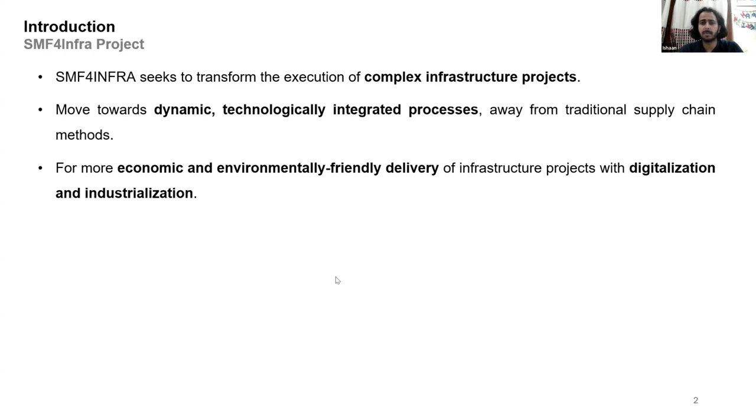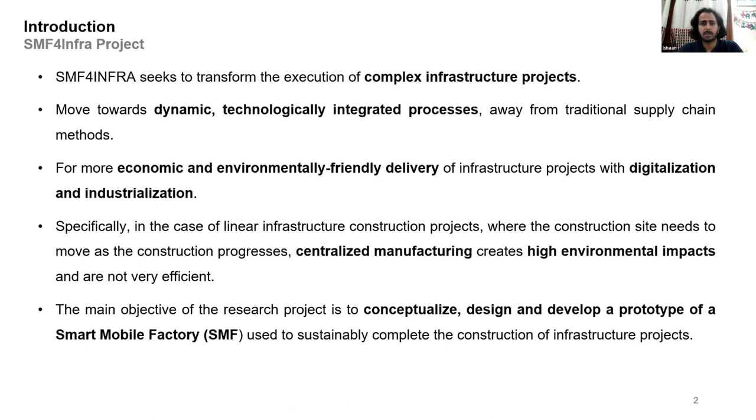The project is about how we are seeking to transform the execution of complex infrastructure projects. The idea is to move towards technologically integrated processes, away from traditional supply chain methods, with a more economic and environmentally friendly delivery of infrastructure projects, through progress in digitalization and industrialization—bringing automation from manufacturing into construction. Specifically for linear infrastructure construction projects like Hyperloop, where the construction site needs to move as construction progresses, a centralized manufacturing idea can create higher environmental impacts and may not be very efficient. So the main objective of the project is to conceptualize, design, and develop a prototype of a smart mobile factory used to sustainably complete the construction of linear infrastructure projects.

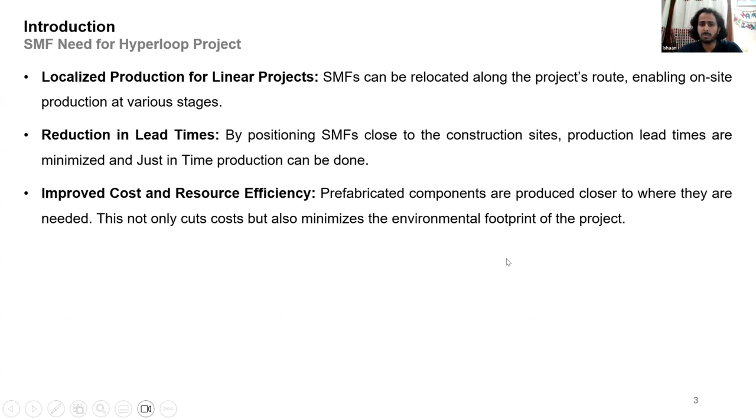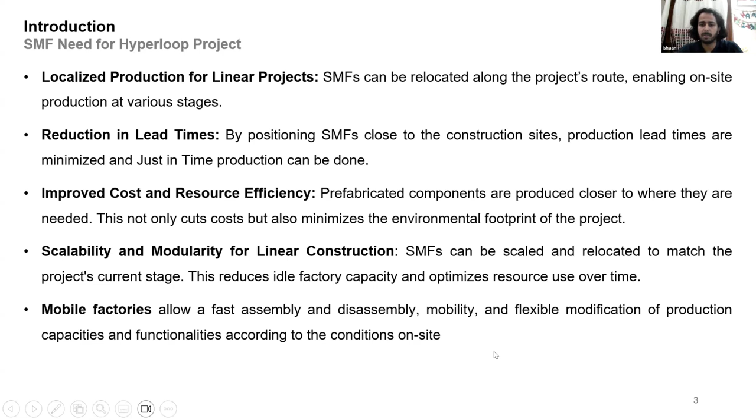Why do we need something like a smart mobile factory—an SMF, as I'll call it—for a project like this? One reason is localized production for linear projects: SMFs can be relocated along the project's route, enabling on-site production at various stages and reduction in lead times. By positioning SMFs closer to the construction sites, production lead times are minimized and just-in-time production can be done. This improves cost and resource efficiency, since prefabricated components are produced closer to where they're needed, cutting cost and minimizing the environmental footprint of the project. Scalability and modularity: SMFs can be scaled and relocated to match the project's current stage and needs, reducing idle factory capacity and optimizing resource use over time. Mobile factories also allow for fast assembly and disassembly, mobility and flexibility, and modification of production capacities and functionalities according to site conditions. That's the broad idea of why we thought of a smart mobile factory for the Hyperloop project.

Based on this project brief, we developed requirements and concepts for the SMF design, because we wanted to have a smart mobile factory design.

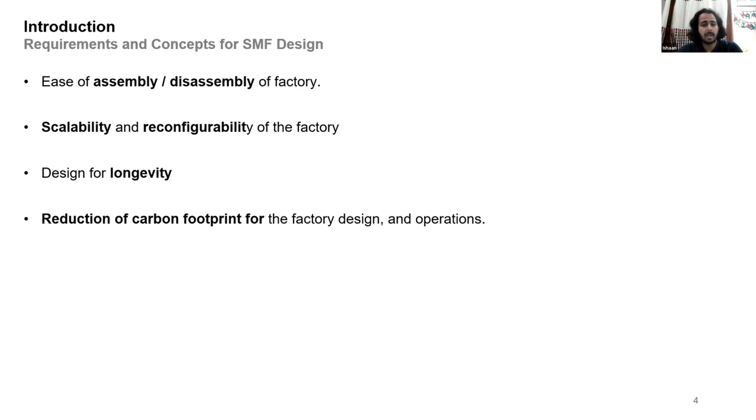The major requirements which came out of our exercises were: ease of assembly and disassembly of the factory, scalability and reconfigurability, design for longevity since you would want to use it for a longer number of cycles, reduction of carbon footprint of the factory designs and operations, and minimizing logistics and intralogistics efforts of the factory.

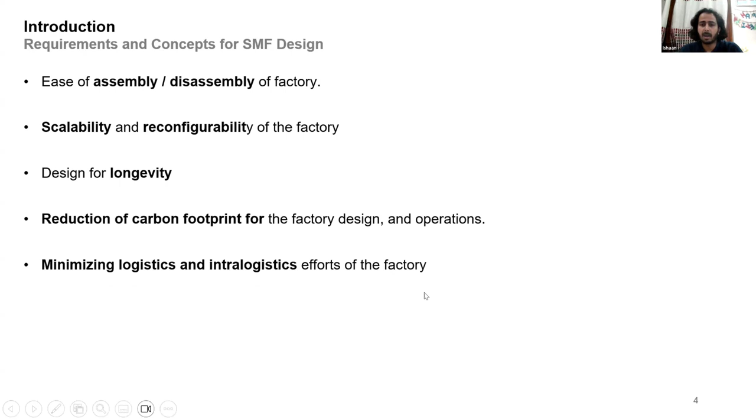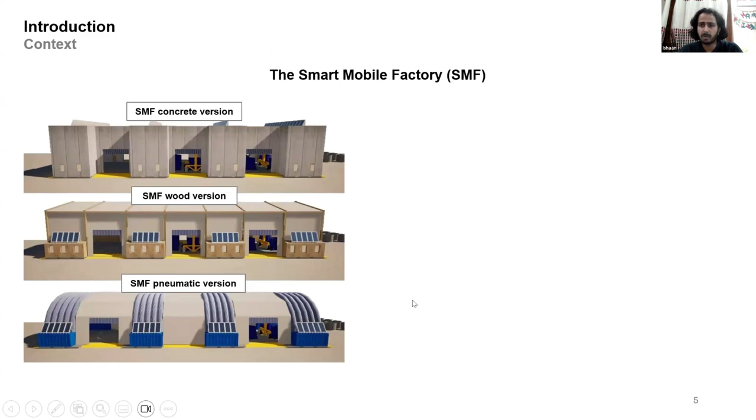There was a whole exercise done, and based on these requirements we came up with three smart mobile factory designs: the first is a concrete based variant, the second is a wood based version, and the third is a pneumatic, more like an inflatable structure.

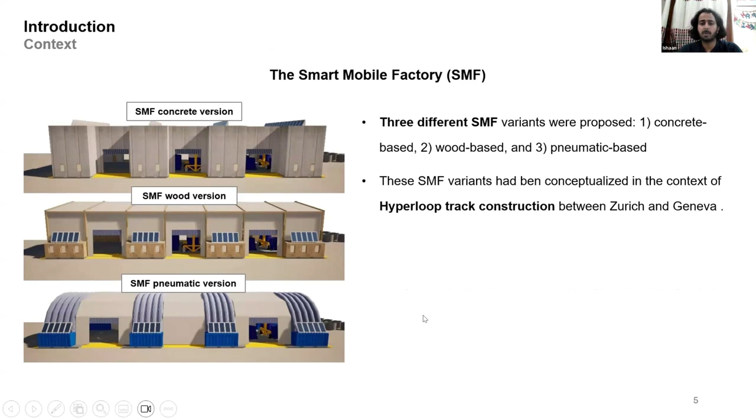So three variants, and these SMF variants had been conceptualized in the context of a Hyperloop track construction between Zurich and Geneva. That's the case we had created for this.

The study I'm going to present now takes into consideration these three versions, basically three concepts, and then performs a life cycle assessment to determine which of these three performs best in terms of environmental performance.

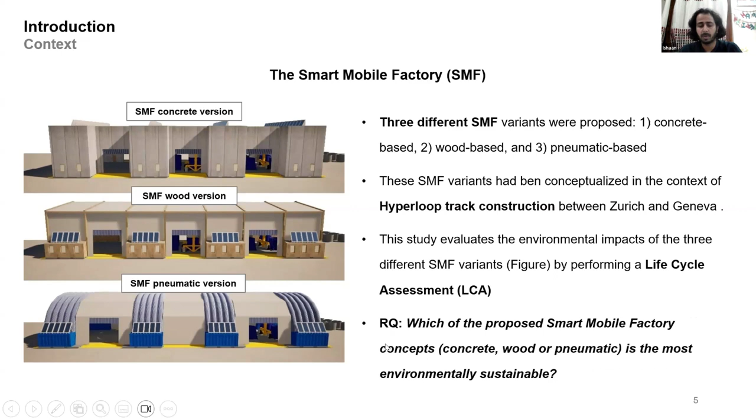The research question I've addressed here is: which of the proposed smart mobile factory concepts is the most environmentally sustainable? Now a little introduction to LCA, because LCA is a method we have used to calculate the environmental impacts.

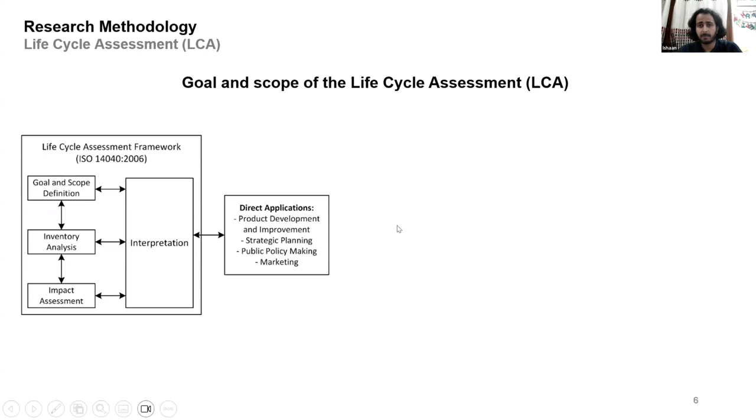For those unfamiliar with LCA, it basically talks about calculating the environmental impact of a product, process, and services, and it takes a whole life cycle perspective into account.

It has basically four steps. It starts with a goal and scope definition, where you define the aim and the boundaries. Then there's inventory analysis, which is the data phase of the LCA where you collect data. Then the impact assessment, where all the data on material consumption, energy consumption, and emissions are translated into environmental impact categories. Then finally the interpretation.

That would depend on the user. Are you a product developer? Are you somebody providing services? Or is it for policy, marketing, etc.?

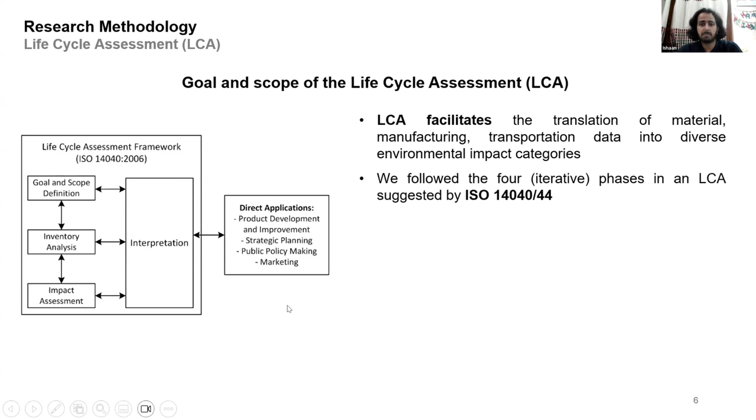So the potential construction of a Hyperloop transportation system between Zurich and Geneva was taken as a reference project for which the parts will be made by the SMF. That's the reference for this study.

The goal of the study is to analyze and compare the environmental impact of three SMF variants, considering the Hyperloop infrastructure construction between Zurich and Geneva.

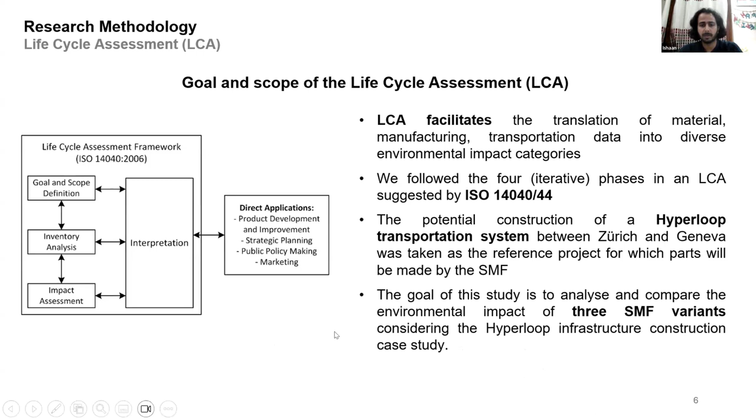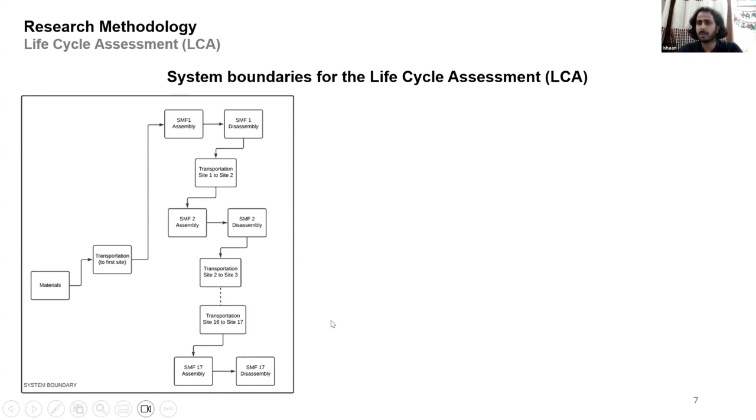So the system boundaries for this study - though this work was done almost a year back and we have progressed further with more findings since, but as it's based on a paper we presented, I'll take you through it. The earlier idea was to move the SMF every 15 kilometers. We chose a functional unit defined as the distance of the Hyperloop infrastructure from Zurich to Geneva, resulting in 245 kilometers.

The distance was modeled as a movement of the SMF from the first location to the 17th location, since we were taking it as moving the SMF every 15 kilometers. That was the idea at that time, which has since changed, and in the next presentation my colleague Jianxiang will take you through that.

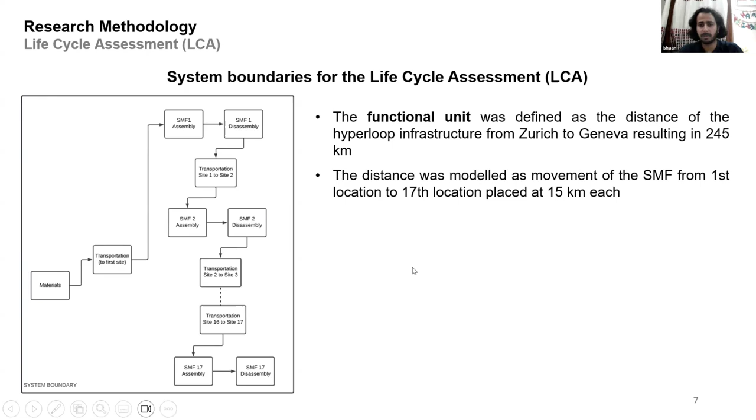The system boundaries included materials for making the SMF. We considered the materials used to construct the Smart Mobile Factory, and the transportation of the SMF during the construction of the project.

So we are taking here 17 different locations - every time the 15-kilometer distance gets completed, we move the SMF to the next location. Then there's the assembly and disassembly cycles of the SMF: every time you move it to a new place, you have to dismantle it and then reassemble it at the new location.

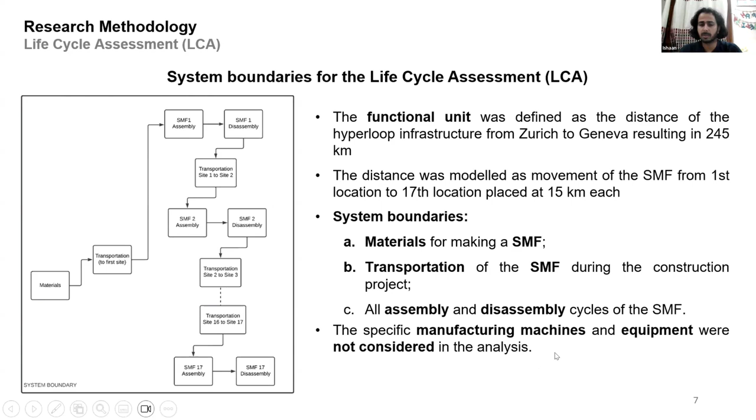Specific manufacturing machines and equipment were not considered in this analysis, because essentially they would be similar in all three versions. This was more about selecting the version which suits our needs in terms of environmental sustainability.

After this, lifecycle inventory data was collected. Since this was in the design phase of the SMF, we had data collected from the BIM models of these three SMF variant designs, and also through the data sheets of the materials and components.

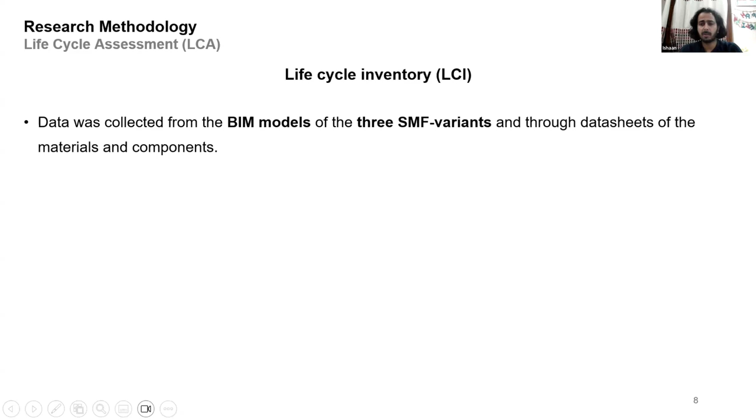From there, we collected the material-related data, the dimensions, and how much material goes into making these SMFs. The assembly and disassembly durations and associated power consumption were estimated in focus group sessions composed of 5 researchers from EuroTube foundation, University of Bolzano, and ETH Zurich, where we discussed assembly and disassembly durations. Reuse cycles for wood, concrete, and pneumatic variants were estimated at a maximum of 25, 80, and 100 cycles respectively.

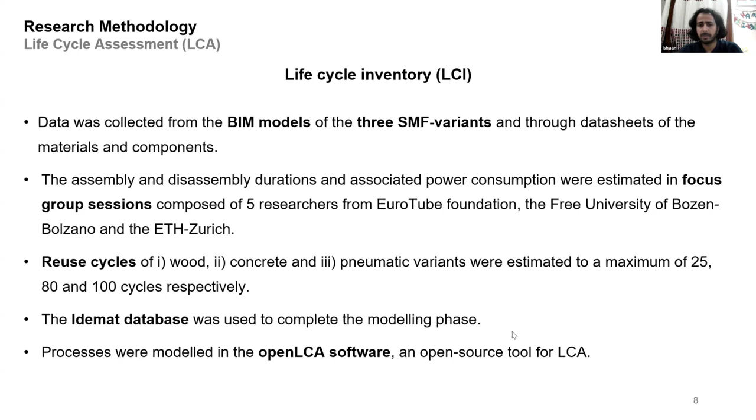The IDEMAT database was used to complete the modeling phase, and the processes were modeled in OpenLCA software, an open source tool for doing lifecycle assessments.

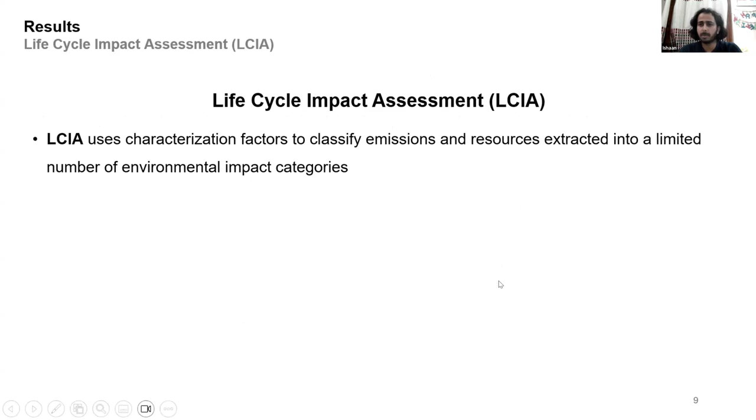Then basically the third phase, the lifecycle impact assessment phase. Here, whatever data we have collected, whatever material inventory we have, we now translate into a limited number of environmental impact categories. This is done through characterization factors, and there are different lifecycle impact assessment methods. What we have used is ReCiPe 2016 Hierarchist, and the impact categories chosen were climate change and human non-carcinogenic toxicity.

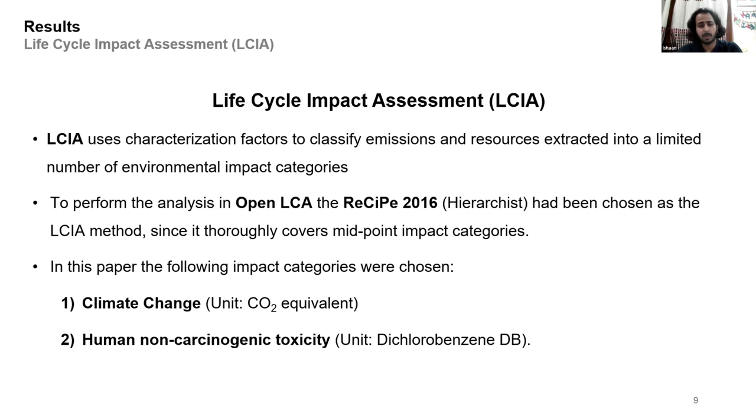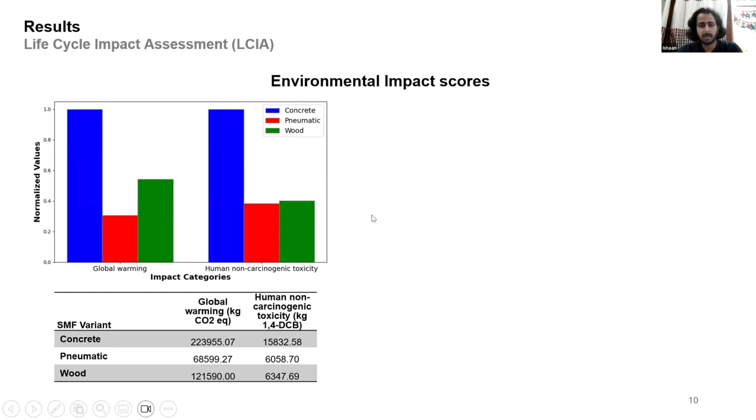Based on all of this study, we calculated the environmental impact scores for each of these three variants. The blue one is concrete, the red one is pneumatic, and the green one is for wood. We can see concrete is the highest emitter in both impact categories. The left side is global warming, and the right side is human non-carcinogenic toxicity. The pneumatic-based variant is the lowest impact in terms of both global warming and human non-carcinogenic toxicity.

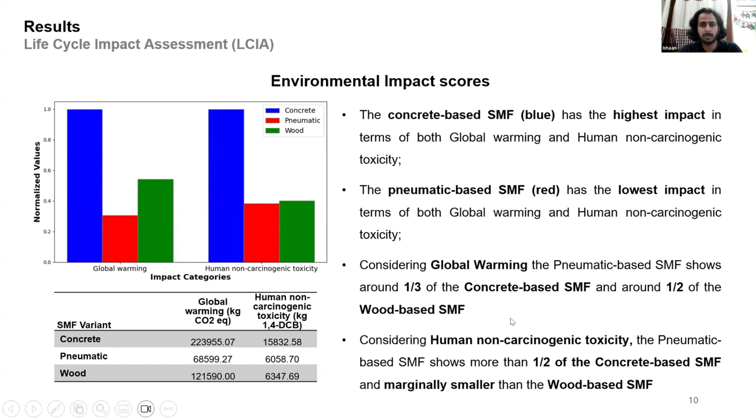Considering global warming, the pneumatic-based SMF shows around 1/3 of the concrete-based SMF and around half of the wood-based SMF. For toxicity, the pneumatic-based SMF is about half of the concrete, and almost equivalent to the wood. Based on this, we can say the pneumatic version is the better one in our case, and this was further used.

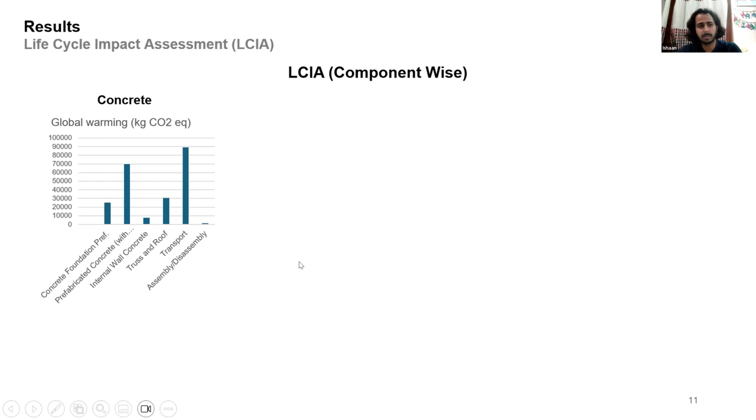A component-wise analysis was also done, since there were different components involved in making these smart mobile factories. For concrete, we can see the foundation, the prefabricated concrete material, and transportation are the lead causes. For pneumatic, the concrete foundation and transportation are the major impact-causing elements. For wood, also concrete foundation, transportation, and the pillars, beam, and truss are the major ones.

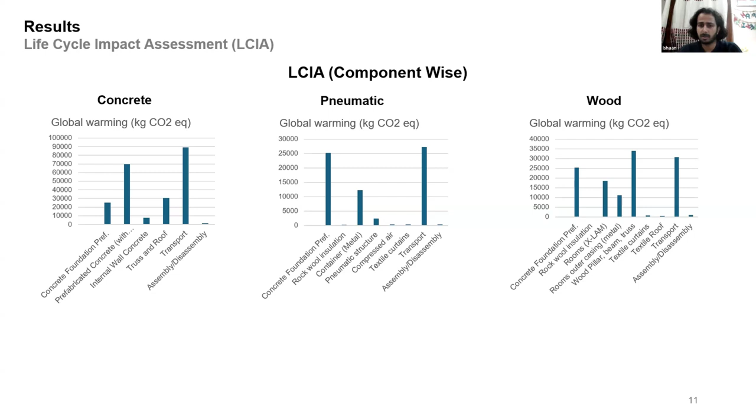Basically the concrete foundation is the same in all three versions, because the foundation has to take a lot of load from heavy machinery. Overall, we can say concrete foundation and transportation have quite a high impact, and the idea is to use such information to redesign and improve the designs further.

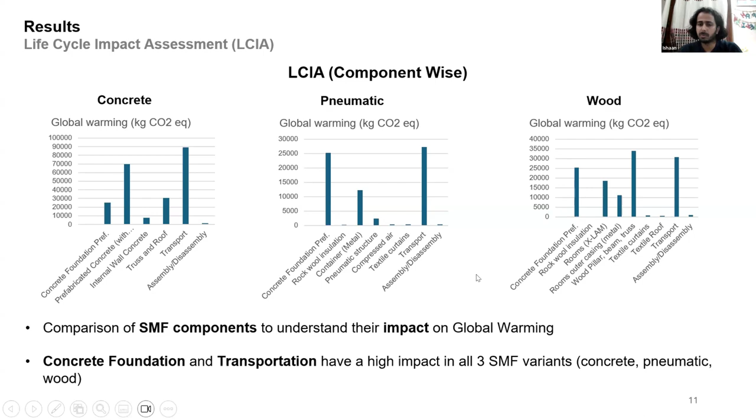The results reinforce the idea of introducing modular, adjustable, and movable factories to improve environmental sustainability, particularly in this case, global warming and human toxicity potential. The pneumatic variant emerged as the most sustainable option from both environmental impact category perspectives. A key contributor to emissions in all three variants was production and transportation of prefabricated concrete floor modules.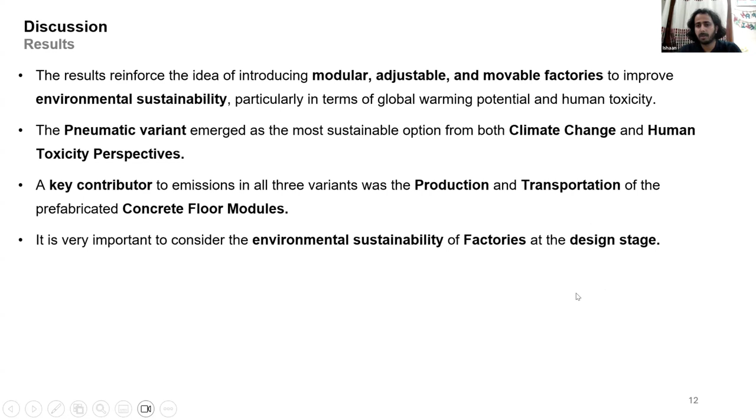It's important to consider environmental sustainability of factories at the design stage, because whatever we design today is going to impact the future, whatever the project duration is. So having such decisions at the design stage is always a good idea, because we can do a lot more at the design stage rather than at later stages of project execution.

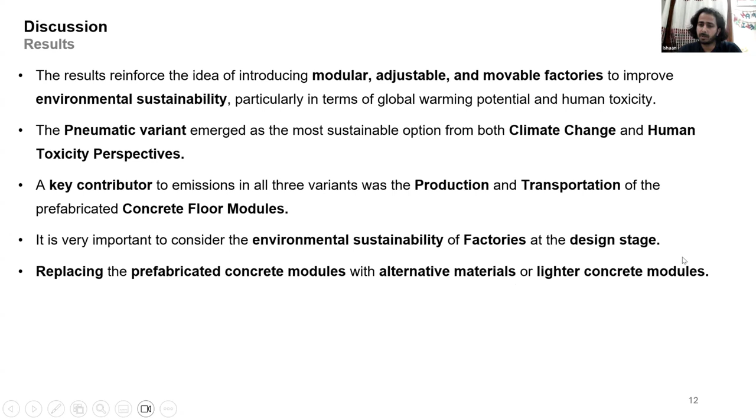Replacing the prefabricated concrete modules with alternative materials or lighter concrete modules is something which can be done, and our team has tried to create different kinds of new concrete floor modules which are lighter, and they are testing the strength, etc.

Also, if we are going with a concrete variant, inflatable roofs can be added to that, which can reduce the amount and quantity of steel required. For the wood-based SMF variant, developing advanced and durable joints could help increase its longevity, thereby enhancing its overall sustainability. So there is something for all the versions to improve, but overall we can do good with the inflatable one, the pneumatic one, and that's the one we chose for our further research.

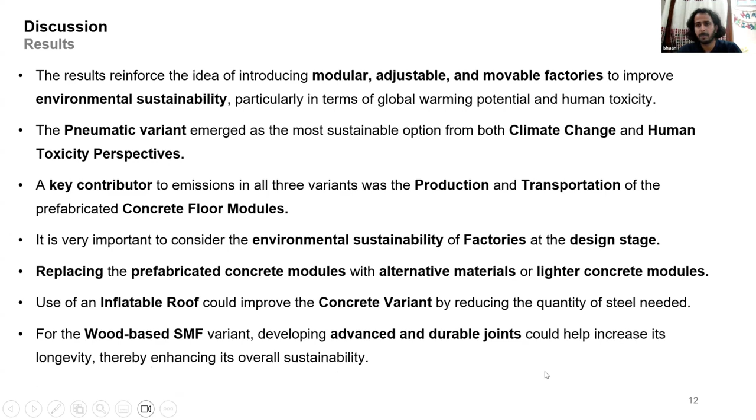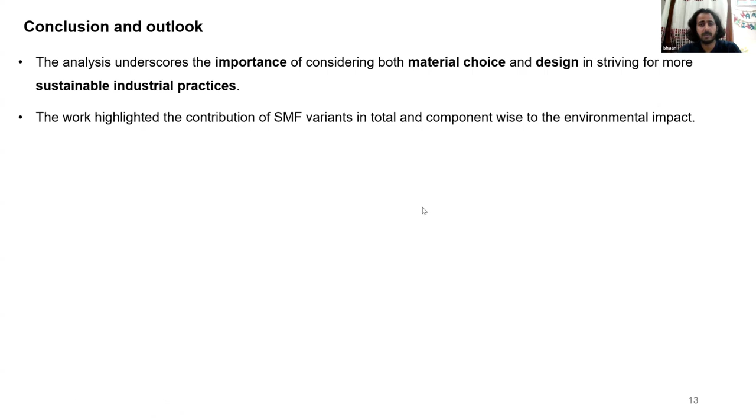Conclusions and outlook. Overall, the analysis underscores the importance of considering both material choice and design in striving for more sustainable industrial practices. The work highlighted the contribution of SMF variants, in total and component-wise, to the environmental impact. The analysis revealed that the pneumatic-based SMF variant outperformed the wood and concrete versions.

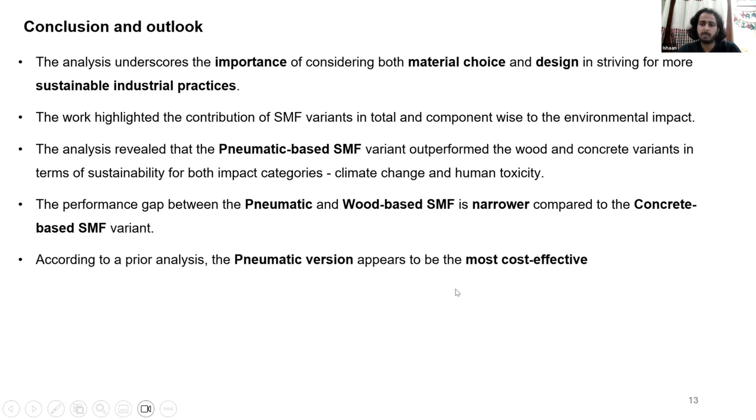The performance gap between pneumatic and wood was narrower compared to concrete. In a previous analysis, the pneumatic version was also the most cost effective. So both economically and environmentally, we can say the pneumatic version performs better.

In the future, we will perform further research activities to expand the analysis and include operations and other supply chain related impacts in these calculations. In more research in the future, the SMFs will also be compared with the traditional centralized factory approach, which I have already done and will present next month, and which was not part of this research paper. This is because transportation showed to have one of the most negative impacts on environmental sustainability.

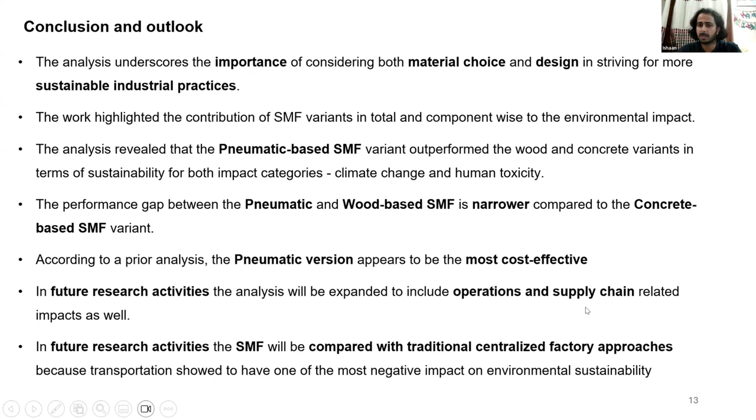Finally, this is the work which I'm presenting right now. You can access it in the proceedings of APMS, a conference on advances in production management systems. This year, last month, we presented this paper there. I will put out a link, and maybe you can have a look at this work as well, where a lot of things I've talked about are done in detail. So I think that's all.

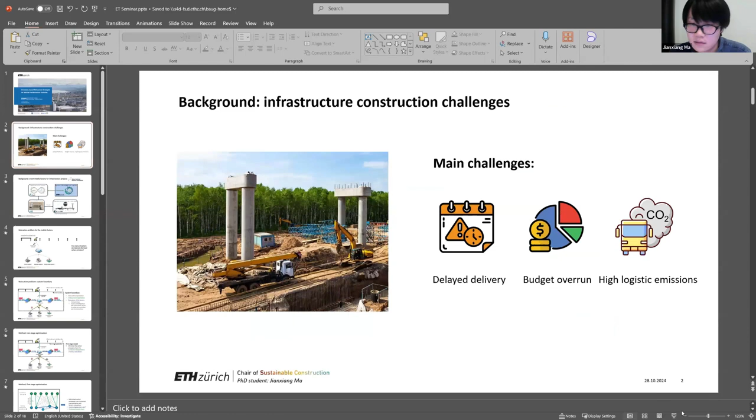So we know that for infrastructure construction, we have three main challenges. The first is that sometimes we have delayed delivery due to the massive production amount for linear infrastructure projects. And due to the delayed delivery, sometimes we would suffer from budget overrun. And also, due to the length of the linear infrastructure, we need to somehow transport the material and also the prefabricated components maybe from very far away, and that may lead to very high logistic emissions.

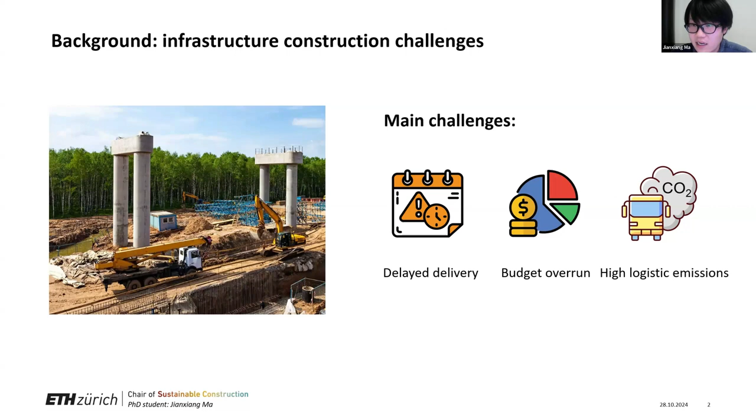And here I just want to give a very high level structure of the smart mobile factory for infrastructure project. So basically, we have three research packages. In the first place, Ishaan's group would design different variations of smart mobile factory that could be relocated. And those factories are used to supply our innovative Hyperloop infrastructure, which would be studied as a case study to estimate the performance of the designed smart mobile factory.

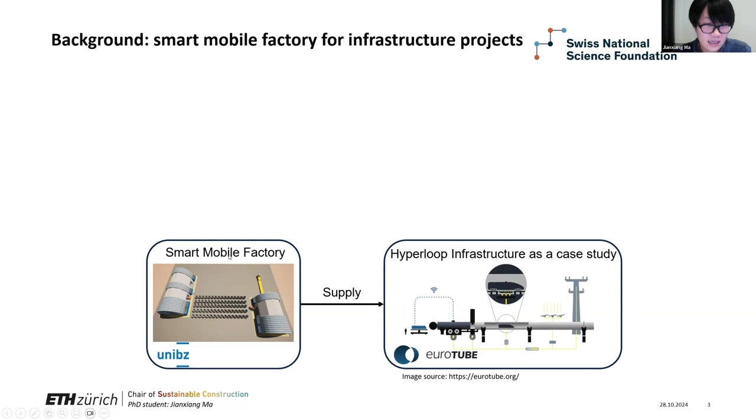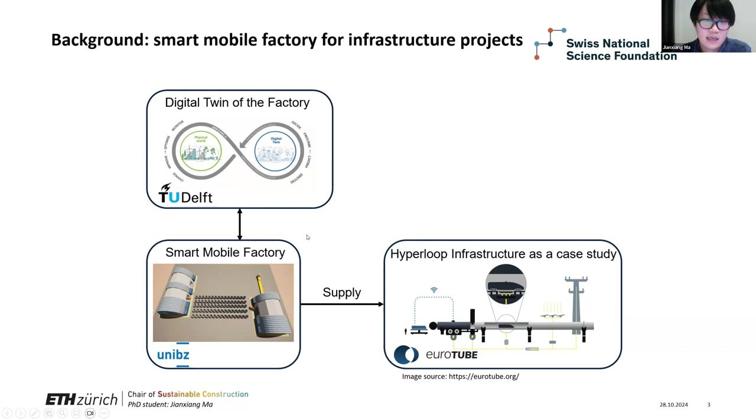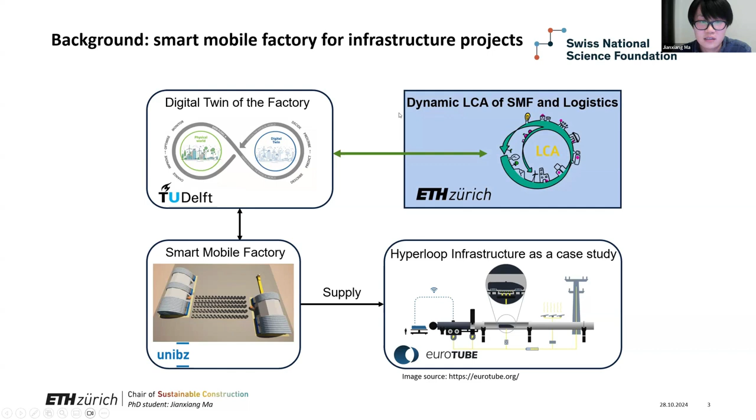And at the same time, we have a digital twin developed for the mobile factory, which utilizes cutting edge technology such as semantic design and integrates with IoT sensors, so that we could collect real-time data in the field in the smart mobile factory and calculate the cost and carbon emissions with higher accuracy. And my job is to utilize the functionality provided by both the smart mobile factory and the digital twin to calculate the dynamic life cycle assessment of the construction process of the Hyperloop infrastructure and also the logistics involved in the construction phase.

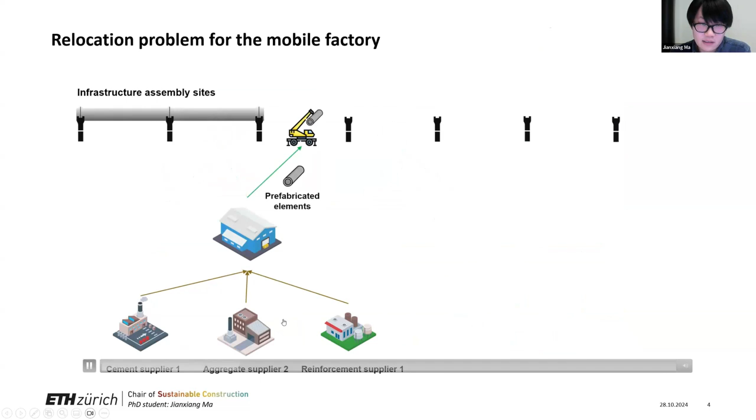So we know that for the construction of linear infrastructures, we need to transport the element from the prefabrication mobile factory, as well as transport the material from the suppliers to the mobile factory.

Based on the current EuroTube design, the main structure is made of concrete, and this kind of material has a really good benefit we can utilize. The location of the suppliers for the mainstream materials - reinforcement, cement, and aggregate - is kind of everywhere, so those three materials are local materials.

Based on this scenario, it is logical to transport the mobile factory instead of the very heavy prefabricated elements, so that we could reduce carbon emissions. Whenever we move the factory, we could find local suppliers for the material we need to produce the concrete prefabricated element.

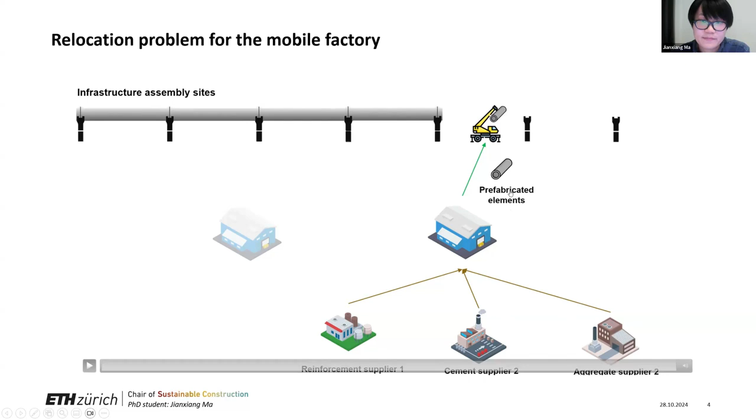So the question is how many relocations we need for efficient carbon reduction. Here is the life cycle assessment system boundary we considered. I think Ethan has explained this part thoroughly in his presentation, so here we would go very fast.

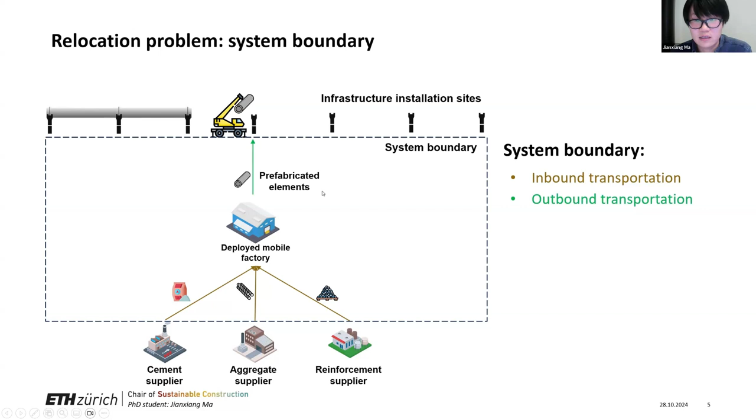The first part would be inbound transportation - basically the transportation associated from material to the smart mobile factory. The second would be outbound transportation, which equals the transport emission from the transportation of the prefabricated elements from the mobile factory to the construction site.

And the third is the carbon emission induced by the relocation of the factory. That includes the transportation of the factory itself and the factory reconfiguration process. It includes site preparation for the deployment of the mobile factory, the assembly and disassembly process of the factory itself, and in the end we would restore the site back to the initial condition.

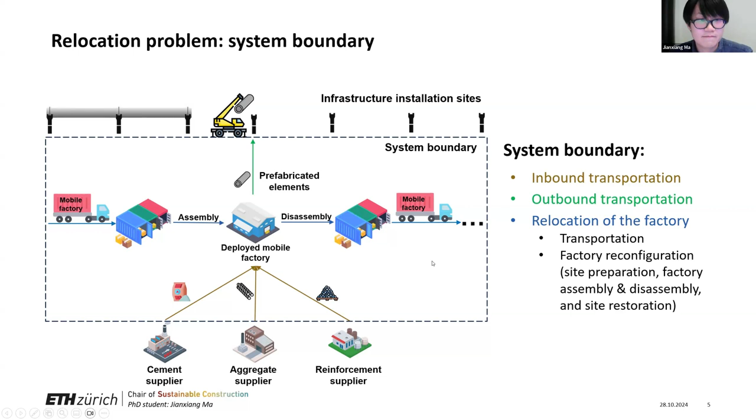Therefore, as I introduced, we could split this problem into a two-stage optimization, because the three main materials could be treated as local material. The first stage model would minimize the carbon emission from outbound transportation as well as the factory relocations.

Here we introduce three binary decision variables in our optimization model. The first one would be the outbound transportation decision variable, which would match the supply from the factory to the construction site.

Based on this decision variable, we could derive the second decision variable to represent the selection of positions to deploy our mobile factory, represented by Y. And based on those two variables, we would have a third binary decision variable that links the selected locations for the mobile factory.

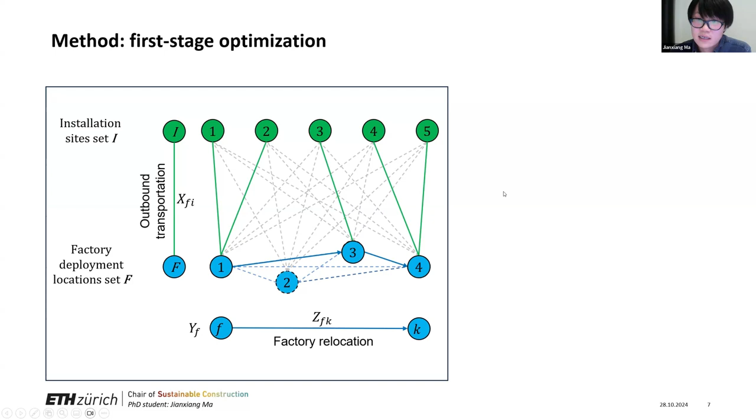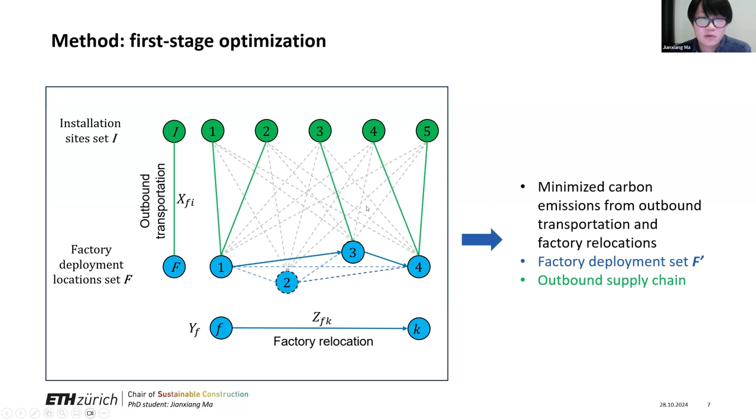So that we could estimate the carbon emission from the transportation of the mobile factory. In this stage, we would minimize the carbon emission from outbound transportation and factory relocations, and we would have the factory deployment set F prime, and also know the outbound supply chain, represented here in the green line.

And in the second stage, we need to locate the material suppliers for the selected locations for the mobile factory with the lowest transportation carbon emissions.

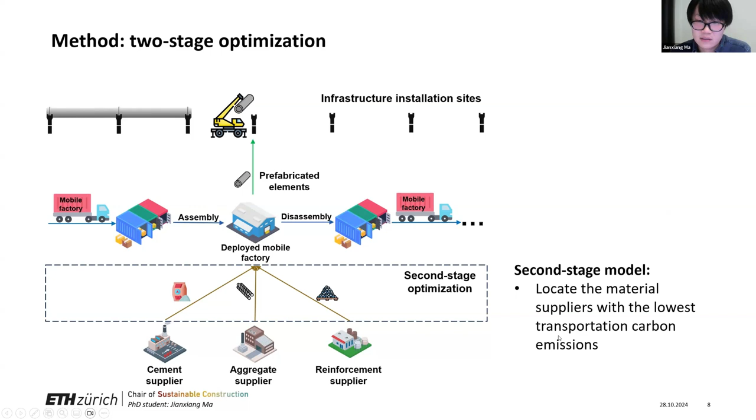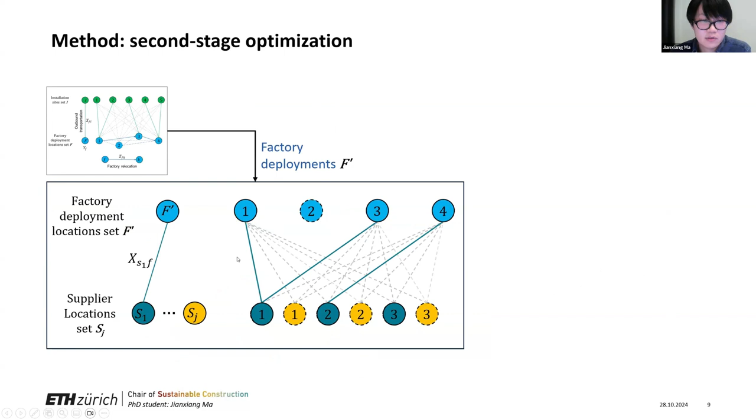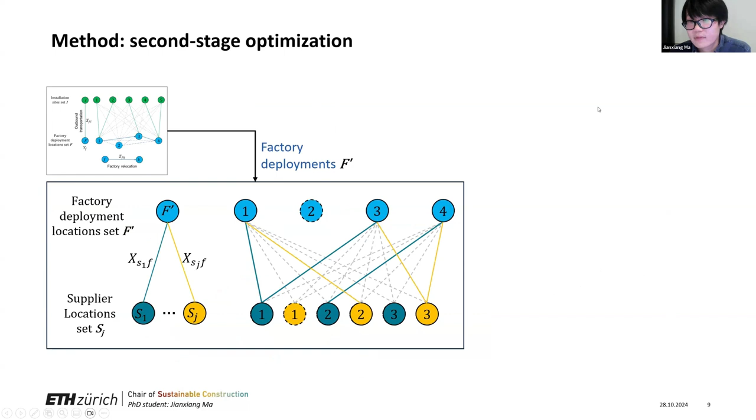Here we can see we have the factory selection F prime, and what we need to do is use another binary decision variable to find the suppliers with the shortest distance. So in this stage, we minimize the carbon emission from inbound transportation. We determine the material supply chain, and finally we could calculate the overall carbon emissions from the logistics.

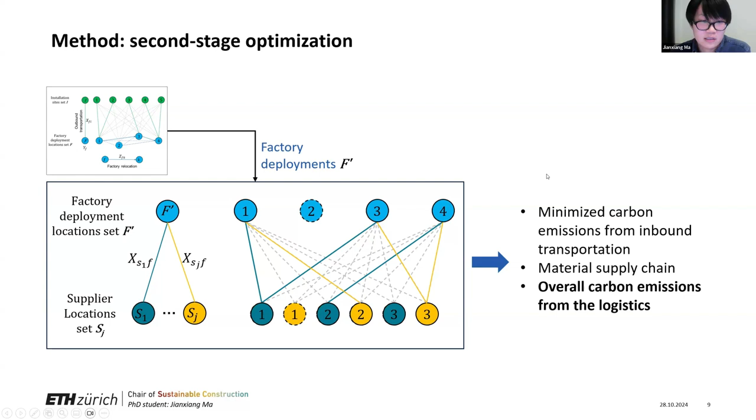The implementation framework of the proposed two-stage optimization model starts with input data from the bill of materials, and we would know the location information of the candidate locations to deploy our smart mobile factory.

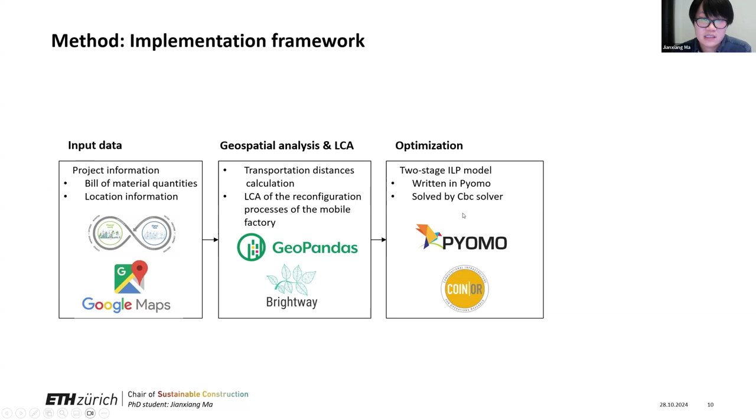That information would be pre-processed by Brightway for the life cycle assessment calculation, and also using GeoPandas to calculate the transportation distance between the suppliers and the materials. In the third stage, we would feed that information into the mathematical optimization package named Pyomo, solved by the CBC solver.

And in the end, we would compare the optimized scenarios for different relocation numbers and, of course, the fixed factory location scenario.

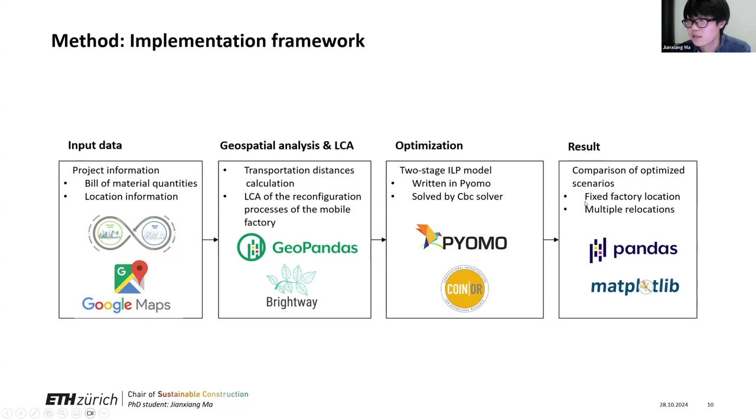So here's the case study we use. We assume the construction line would be from Zurich to Geneva, which is 248 kilometers. And for the infrastructure weight, it's 6,269 tons per kilometer.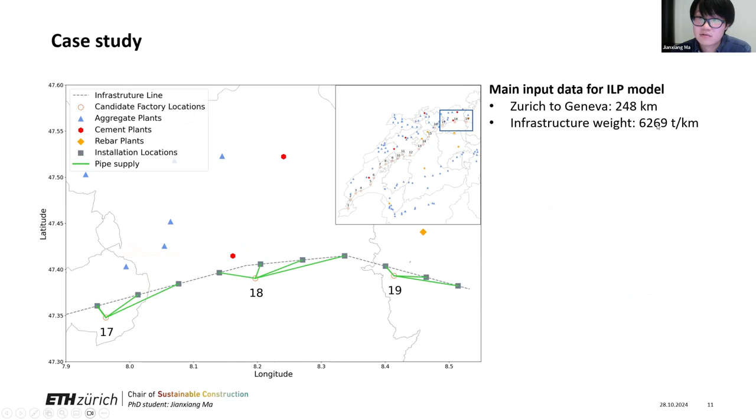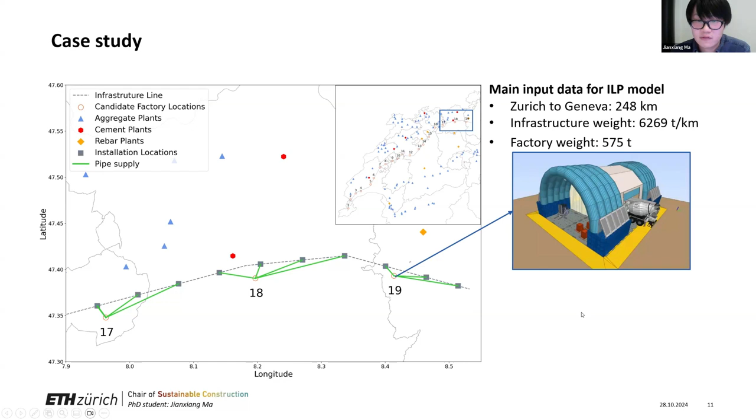And the weight of the smart mobile factory, here we use the pneumatic version, which is very lightweight, and it also includes the equipment we need during the prefabrication process of the component, and also those are the carbon emission indicators for the transportation.

And we have the results for the studied scenario. We could see that we kind of have the optimal, which is like 17 relocations. And we could see that the factory reconfiguration process and also the transportation process of the factory is really small.

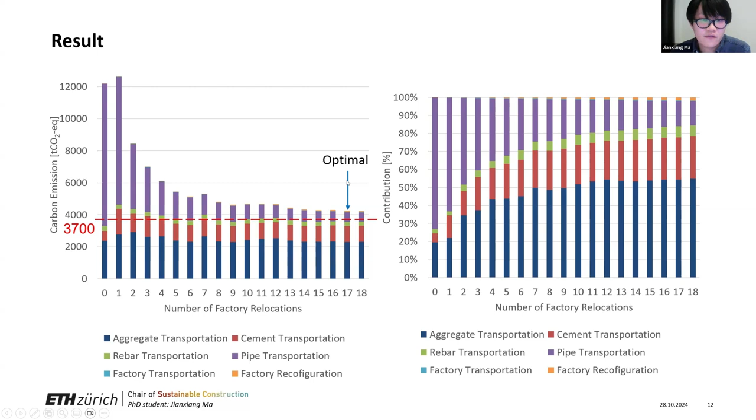The contribution of the transportation for those two are really small, and the average of the overall carbon emissions is around 3,700 tons of CO2 for 1 kilometer of construction of the Eurotube.

And here we can see the transportation distance for different relocations. The first one is for 4 relocations, the middle one is 6 relocations, and the last one is 8 relocations. As the relocation increases, the main reduction is thanks to the transportation distance reduction of the prefabrication material, that is the outbound transportation.

For different locations of the mobile factory, the transportation distance of those local materials varies, but only a little bit. And when it corresponds to the carbon emission from the material supplier, that is the inbound transportation, it varies, but not a lot.

So based on this study, the main reduction is due to the reduced transportation distance of the outbound transportation, that is the transportation of the prefabrication component. We see that when the relocation numbers exceed 6, it varies - sometimes it goes down, sometimes it goes up, and we cannot achieve a huge reduction by increasing the relocation numbers.

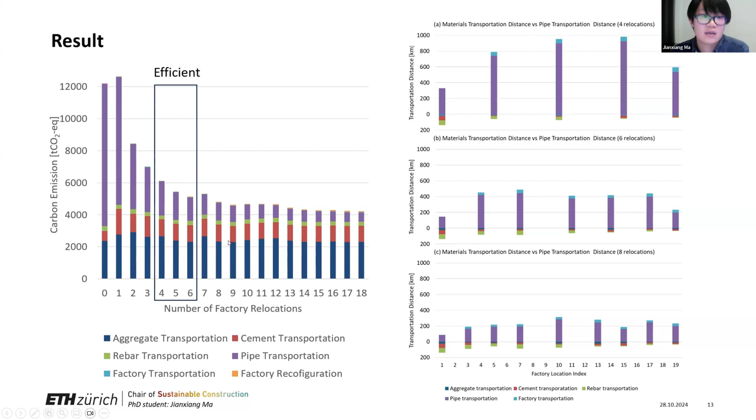So we suggest that for this case study, 4 to 6 relocations would be efficient when operating the smart mobile factory.

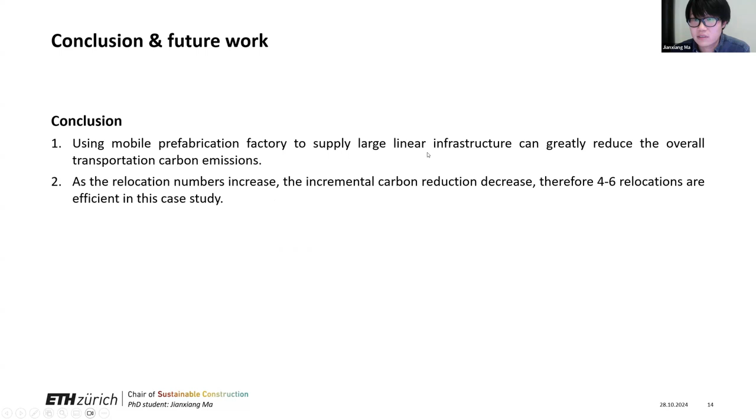So the conclusion is: first, using mobile prefabrication factory to supply large linear infrastructure can greatly reduce the overall transportation carbon emissions. And as the relocation number increases, the incremental carbon reduction decreases. So we propose 4 to 6 relocations.

And the current work is we are conducting a sensitivity analysis based on different scenarios. That means we would generate different lengths of the Eurotube infrastructure, and we would somehow modify the locations of the suppliers. Based on that, we would conduct our sensitivity analysis to see whether the recommendation of 4 to 6 relocations - like every 50 kilometers we could relocate the mobile factory - could be applied into different scenarios.

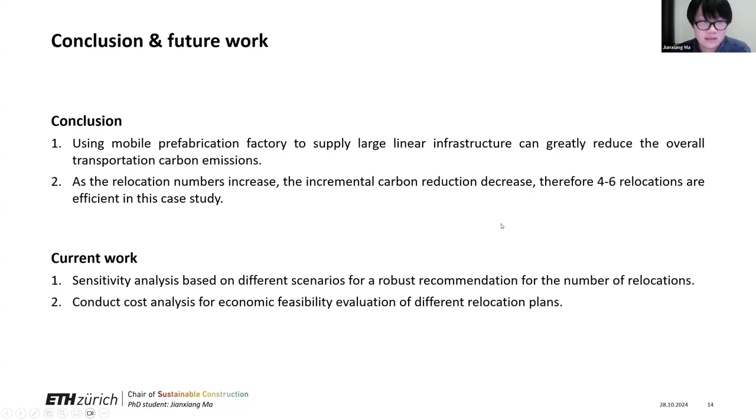And at the same time, we conduct a cost analysis for economic feasibility evaluation of different relocation plans. And that marks the end of the presentation. Thanks, everyone. Thank you for staying late with me.

Any questions? Right. Thank you very much for your presentation. I was saying one, there's now 2. There might be more. So the first question is asking, how did you characterize the case you compared it to?

I think it's mentioning no mobile factory. Is literature available for such a case where you have no mobile factory? Hyperloop seems to be a kind of outlier for those infrastructure projects, but maybe wind turbines have similar transportation constraints as Hyperloop tubes. How did you compare your mobile factory case to a no mobile factory case?

Yeah, that one is like basically everything is the same. We just deploy the smart mobile factory once, and we don't move it. So that means we have 19 candidates, and we select the best one, and no movement of the mobile factory at all. So it's not one factory somewhere in the country, but it's one mobile factory, but stationary basically.

Yes, because if we put the mobile factory at the end or at the start of the infrastructure, it would have a really high emission. So in this scenario, I didn't show the map, but basically it's lying in the middle of the infrastructure line, so it's kind of really good - that would be the best case somehow for the stationed scenario. It's not that we modified it so that we could have a good result.